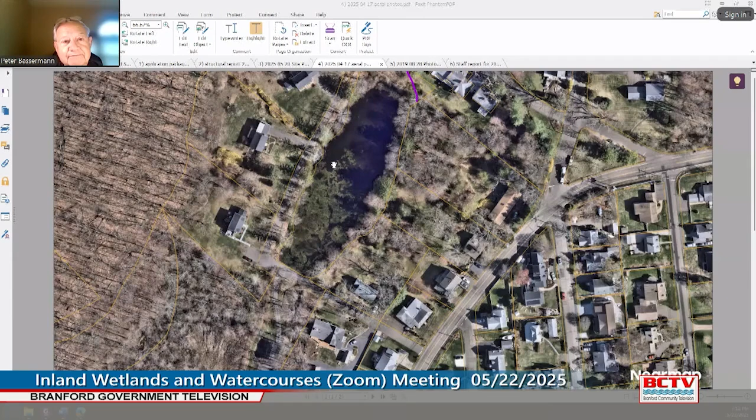So this road here is Hotchkiss Grove Road, and Orchard Ave comes off of it. The subject bridge is, if you look at the pond area, you can kind of see a straight water course, and the bridge crosses over that culvert water course. Recently, the commission had an application for the ponds, which is the condominium property just to the north of this pond, just for a little bit of extra context.

So with that being shared, I will hand it over to the applicant to give an overview of the project. Paul? Thank you, I hope you can hear me. My name is Paul Muniz. I'm the chairman of the Solid Waste Management Commission here in Branford.

I'm also the past president of the Hotchkiss Grove Shore District, and I'm the current vice president of the Shore District. The Hotchkiss Grove Shore District is responsible for private road maintenance within the dimensions of the district, even on private property. So we have to maintain private roads in our district and then private roads within our private district.

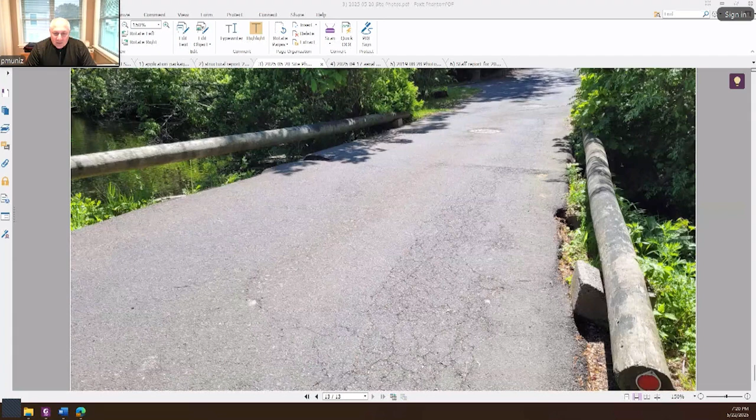At this point, it's the only road in Hotchkiss Grove that has a bridge. At the point of the bridge, it's significantly narrower than all the other roads in the district. It's unique in that, with the exception of Orchard Avenue, all of the avenues in Hotchkiss Grove are jointly owned by all of the property owners. So you own your property, and then you also own all of the roads. But on Orchard Avenue, built after the original 1920s deed subdivisions, the property lines extend differently.

The property lines extend all the way across what otherwise would have been a jointly owned right of way, not just to the center of the road. It's kind of a jigsaw puzzle of ownership across the full dimension of the Orchard Avenue paved roadway. It's very unique, to say the least.

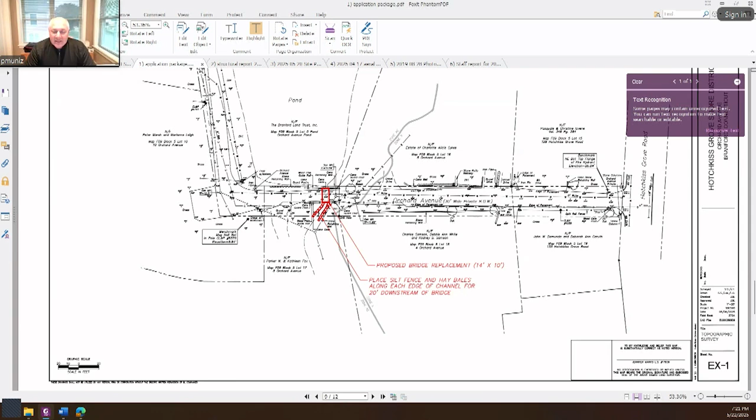One other overview question: each deed does carry an easement to the shore district or to the association for use of the area that serves as the right of way.

Another question: the culvert, which seemed to be an issue in 2019, has somehow improved over the years? Even in the 2019 application, the comment on the culvert was that it is in no danger of failing.

But I think the approach in 2019 was to replace the combined culvert and bridge feature with something called a box culvert, which is capable of being driven over. So the idea was remove the culvert, remove the bridge, install a box culvert — you get two for the price of one, but the price of one was more than the board had money to spend, and it stuck in the throat that we were replacing a culvert we didn't own and had no specific responsibility to replace.

So it took seven years of — I won't say arm twisting, but education — to come up with a means of providing a bridge that was acceptable to the board.

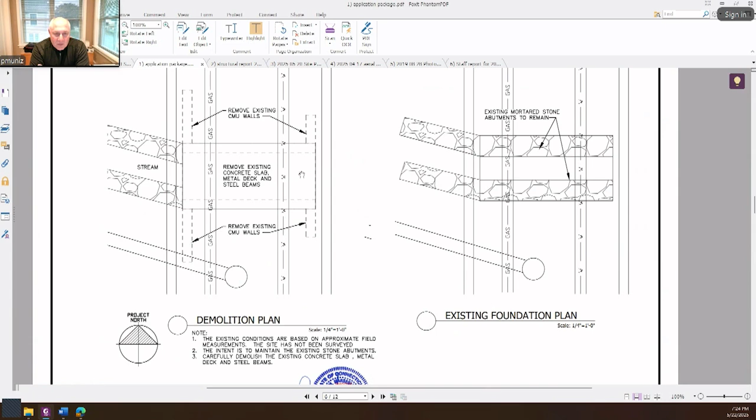No — the bridge deck at present consists of beams laid on the stone culvert. A corrugated steel pan was placed on top of the beams and concrete was poured into the pan; that's the current bridge. We're going to remove that pan and the beams, and then further outward from the culvert, we're going to excavate trenches, cast them with reinforced concrete, and lay a bridge deck across the new foundation. So it will span larger than the existing bridge, and it will not be loaded onto the culvert.

Now, what is the current age of the bridge? We believe it was built in the 50s or 60s, probably on a weekend. It lasted a while.

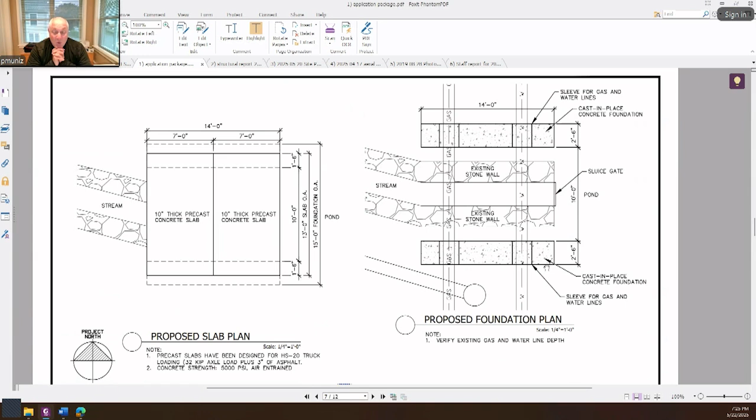My only concern is that interior beam. It's going to be gone. The beam will be gone. So, the whole bridge deck will be removed, and something bigger will be installed essentially over it.

I don't have any analogy I can offer you without thinking too hard. Okay, all right, I appreciate it.

Jamie Frederick, Wetland Agent: something we didn't really discuss is how will that existing bridge plate be removed in a way that won't result in anything falling into the watercourse of the pond? Good question.

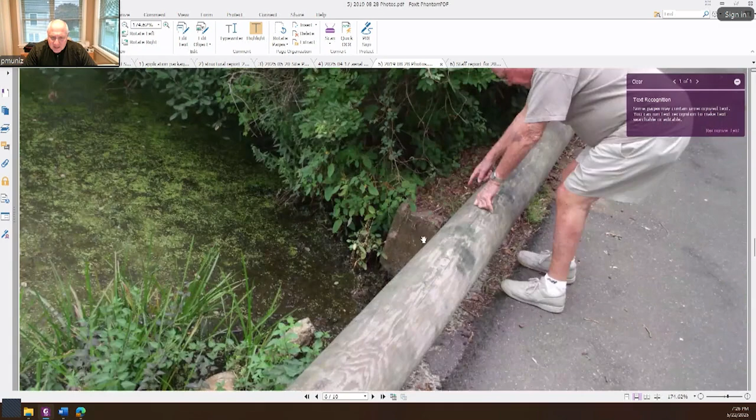There are some photos that you might be able to put up. There's some space between the top of the culvert and the bottom of the bridge. We could lay plywood in there to catch any broken pieces as the bridge is being taken apart.

Is there any, let's see what else we've got for photos. I think there was a view of the beam. Yeah, right there, maybe.

So we should be able to either put a net or some plywood in there to catch any pieces of concrete that might fall into the culvert. There's also, the culvert is, well, that's the culvert, but there's an image, I think it might be photo number 10, that shows what this culvert discharges to.

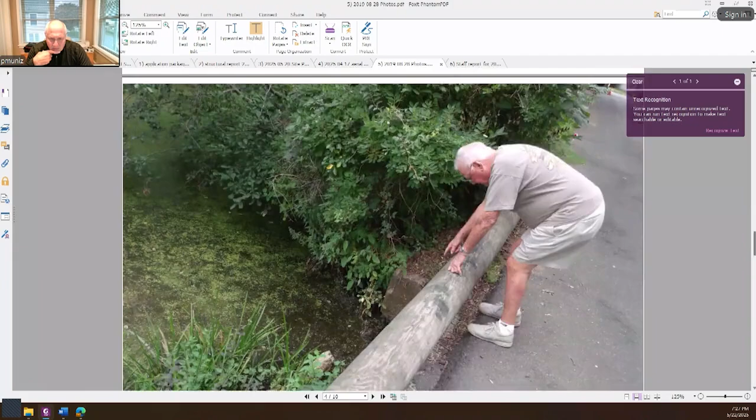Keep going. It might be in the... Yeah, that one. Back one. Okay. Yep. Right.

So this is the view looking downstream from this little 10-foot bridge into the applicant's property, 8 Orchard Ave. It's a stone-lined water course with an inch of water in it. If any pieces fell in, we could hand pick them out.

This is Commissioner Bassermann. Jamie, would it help to look at the staff report and the questions that were raised as you thought of the staff report, to kind of focus our attention here? We could potentially do that, or it sounded like Mr. Muniz may have prepared some responses for those items. I'm not sure which makes more sense. Would it be helpful to look at the plans while you go over that?

Yeah, I could go through it pretty quickly. Okay. So, with respect to the staff report, if you each have it handy, the first portion is the site history.

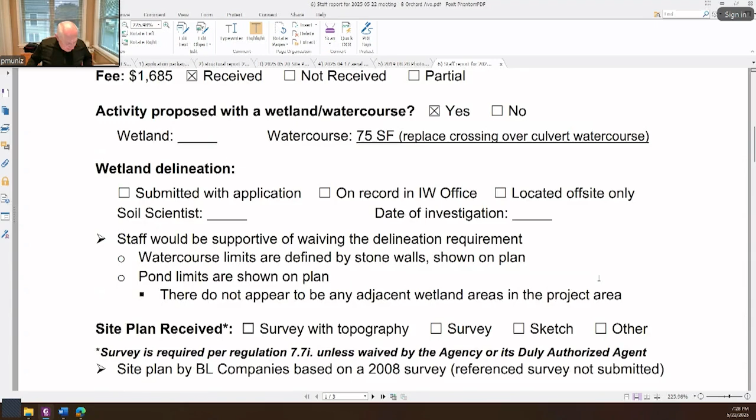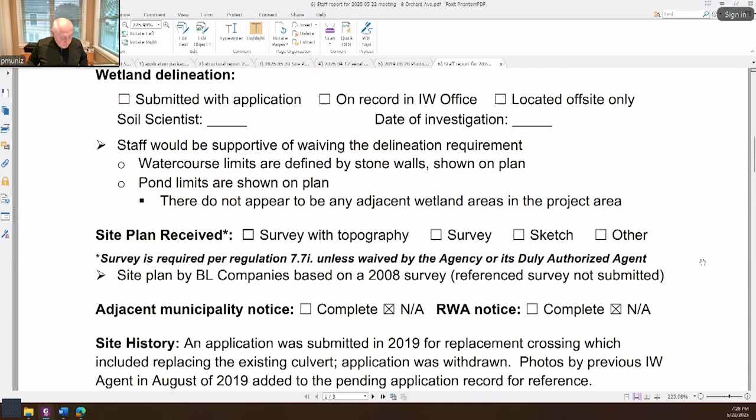As I said, we need to replace the failing bridge within the mapped wetlands area. The 2019 application proposed a culvert replacement, but the culvert is not faulty - the bridge is failing. I don't know what else I can tell you for history. Let's see here, what other...

The plan is to work during dry weather, going back to the history. So the plan was to work during... okay, so look at this one. The 2019 application was different - it included drawdown for the culvert. We're not replacing the culvert, so we have no intention of drawing down the water level. And we do, I would say, intend to do the work in dry weather.

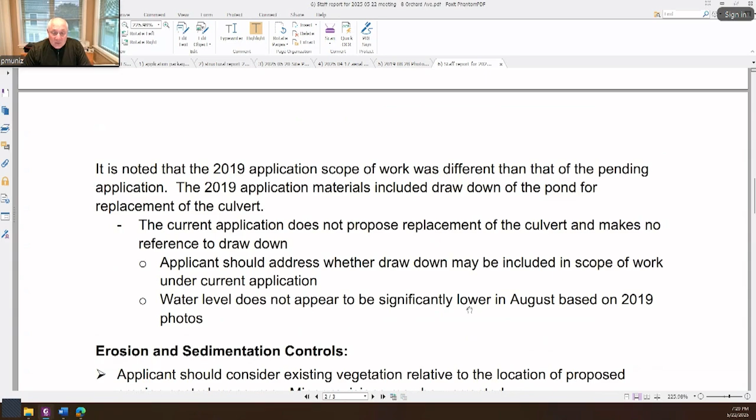Ms. Frederick has pointed out that the 2019 photos taken in August show similar water levels. I will say two things: one, we don't intend to drop the water level. If it is lower, it'd be favorable.

I will say I do not know the process that the property owners used to manage the water level when it was owned by the 8 Orchard Avenue owners. And I don't know what process the Branford Land Trust uses, or if anybody even knows that they can adjust the water level. We could talk to the former owners and find out what the practices are, but we're anticipating.

I've lived in the neighborhood for 35 years. I have seen that thing just be a mud puddle. If we were to see it, if we entered a drought period, we would seek to initiate the work as close to that as possible.

The next section of the staff report was on erosion and sedimentation controls. The first bullet was the request to consider existing vegetation relative to the location of proposed erosion control measures. Minor revisions may be warranted. We discussed that in the field. And I think...

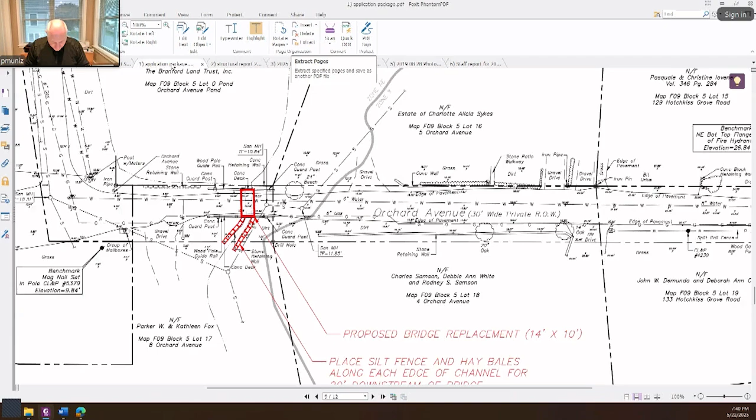That's good. It's also shown in the 2019 drawing. So the design plans call for removal of... well, I take a step back. The notes for the demolition say carefully demolish the existing concrete slab, the metal deck, and the steel beams, which is shown in the drawing.

The drawing also shows remove existing CMU walls. The CMU walls are non-structural and really are only serving as wing walls, or, they're installed as wing walls.

They probably functioned as curbs when they were initially built. What the note should have said on the drawing is remove the existing CMU walls to the extent necessary for construction. We don't really need to remove those CMU walls other than where they have any conflict with the dimension of the foundation trenches to be excavated.

To the extent that any CMU wall is removed, that volume of concrete block will be replaced with cast in place concrete volume. So it's a non-structural feature. Removal of any portion of the CMU wall won't affect the wing wall or curb function, because it's going to be replaced volume for volume with cast in place concrete.

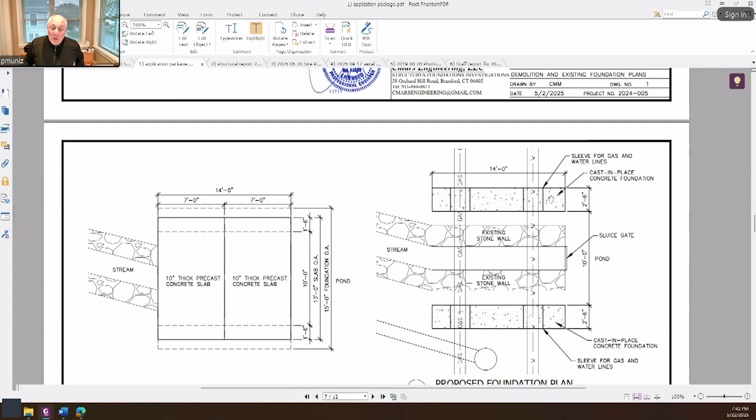The last sub-bullet is to consider any potential conflicts with the sewer line, which is a legitimate concern. There is a sanitary sewer manhole in Orchard Avenue south of the bridge. That manhole directs flow. From that manhole, the line travels west into the 8 Orchard Avenue property.

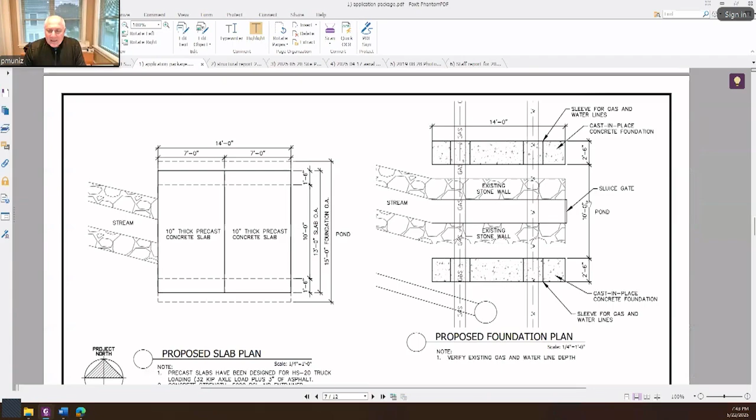I think it was photo 10 on the 19. It's also shown on the survey. Yeah, kind of, you can see it. So it travels south of the culvert into private property. It does not intersect with the intended placement of the foundation trench on the south side of the bridge.

We do not have the invert elevation of the sewer line in either manhole, which we can get. I don't know that we need it though. The interaction of the sewer line with the intended foundation trench...

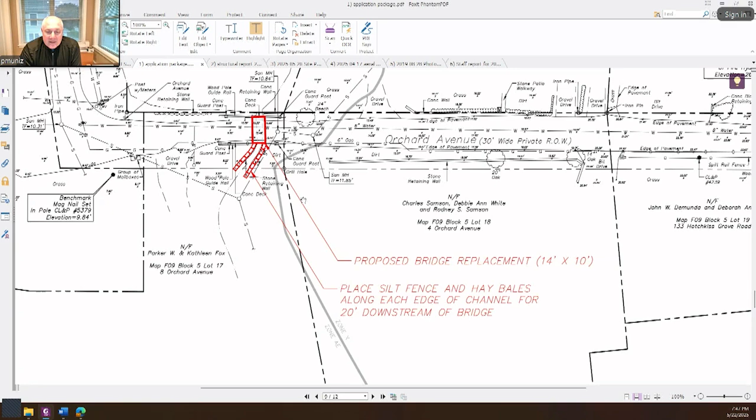If the bottom of the foundation extends lower than the sewer pipe, there will be no horizontal load on the sewer pipe. If the bottom of the foundation is higher than the elevation of the sewer pipe, there's a potential for a horizontal load onto the sewer pipe. In that case, according to the design drawing, the bottom of the excavation would be filled with crushed stone to distribute that load further and take the load off of the sewer pipe.

In addition, not shown on the drawing or plans, in consultation with the engineer—if we go to sheet number 2, this is sheet number 3. If we go to sheet number 2, on the right-hand side, the south foundation shows proximity to the sewer line, which is that manhole with the lines coming out of it. The western side of that southern foundation could be tapered.

Instead of being 2 feet 6 inches wide, it could be narrowed down to as thin as, I'm going to say 20 inches. I had it written down. So we could taper the shape of that southern foundation to increase the distance from the corner point of the foundation to the sanitary line. It's a good question, and we have a couple of different solutions that we could provide. The selection of the solution, if it turns out to be a problem in the field, would probably need to be determined in the field based on the actual position of the sewer line.

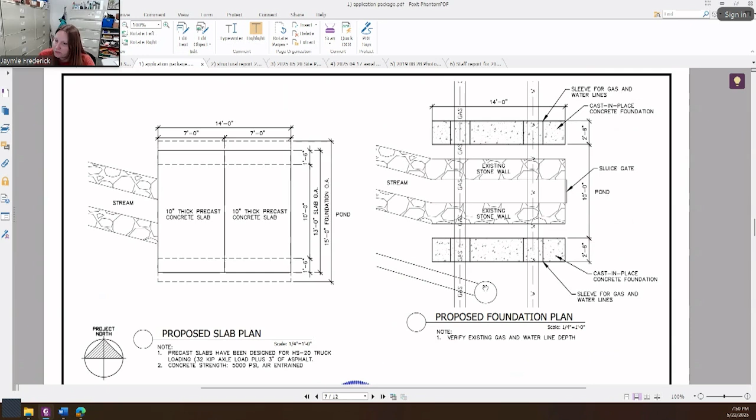The engineering department has reviewed and provided comment, which I did not get in the Dropbox today, but I was CC'd on. The comments pertain by and large to this concern we're talking about right now, and there are also some comments about ensuring that the flows are not changing and that flood status will not change. This is Mr. Muniz. I did obtain comments from Jennifer Aquino in the engineering department today at 3 o'clock, and she did address this same topic with respect to proximity to the sewer line.

I spoke with the engineer about it after I received the comments, and those are the suitable responses. We could taper the shape of the foundation on the south side to increase the distance from the sewer line. It could go down to 20 inches, possibly even 16 inches of width in that corner to meaningfully increase the separation between the foundation and the sewer line. Alternatively, we can clarify the final depth of the foundation once we learn the burial depth of the pipe.

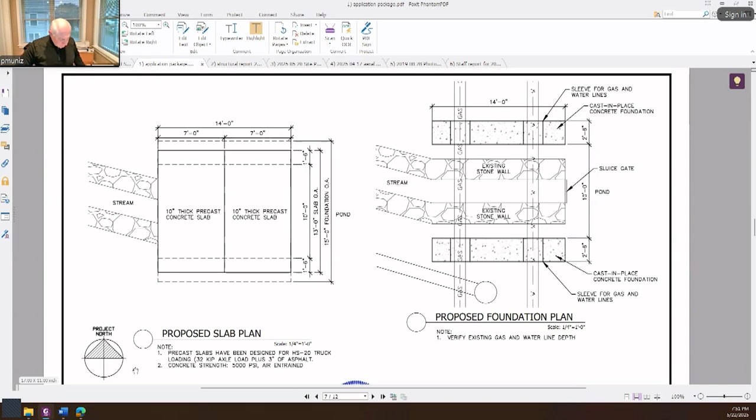The last two areas of staff comments with respect to stormwater: will there be any changes in stormwater management with respect to existing road drainage sheet flows on the east side? Stormwater drainage flow only comes from the south side of the bridge, which is higher elevation than the north side.

On the east side of the south side of the bridge, the camber of Orchard Avenue is oriented to the east, so water flows across the road, sheet flows onto landscaped property south of the pond.

On the west side of the south side of the road—in this image it would be... wait, no, on this image it would be the right-hand side of the drawing, on the upper part of the image above that stone wooden guardrail. There is some flow on that side of the crown of the road that runs down a gutter.

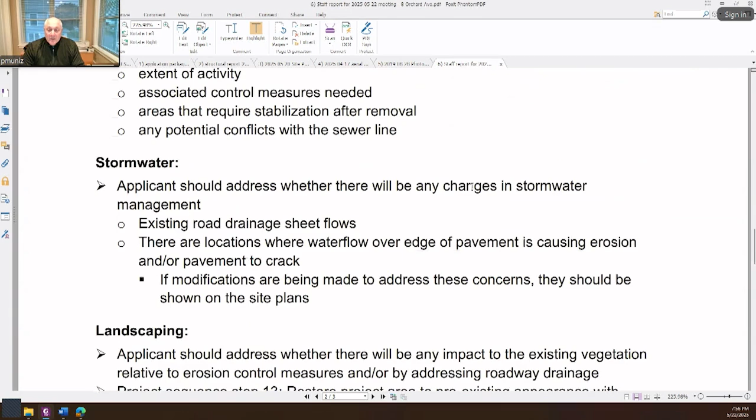The last area of consideration was landscaping. Will there be any impact to existing vegetation caused by the erosion control measures? I would say it would only be temporary. As I pointed out, they're below the first level of branches on the non-invasives. There's a couple of feet of clearance where we could install silt fence and hay bales on the south and west side of the bridge. That's really the most sensitive wetland portion of the construction.

We offered to provide a wetland seed mix after construction is complete. We can include a specification for the mix that we would obtain if that's needed, and I think it's something the commission typically likes to see, with the understanding that it could always be swapped out for something comparable. If you have a preference published somewhere, we'd be happy to use it.

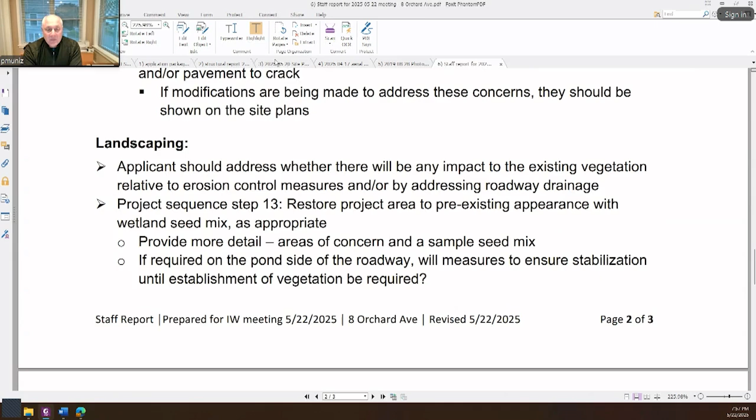The last question was, if required on the pond side of the roadway, will measures to ensure stabilization until establishment of vegetation be required? Again, if we go to one of the photos, the only thing we can really do there is silt fence or hay bales. There's not a lot of room to work.

Jaymie Frederick, the Wetland Agent, asked: for the commission's benefit, would you be excavating the entire width of the road to put in the footing, or is the footing not as wide as the pavement? The footing is going to be as wide as the final bridge deck. The design calls for 14 feet of width.

After being in the field the other day, I checked on the typical width of fire apparatus, which is 8 to 10 feet. We conceivably would modify the design to go down to a 12-foot width, so we have a little more room to work with within the roadway without threatening the wetlands on either side. A 12-foot road and a 12-foot bridge instead of a 14-foot bridge would still be adequate for fire apparatus, but we want to excavate the least width necessary. The planks would be 6 feet instead of 7 feet, times 2.

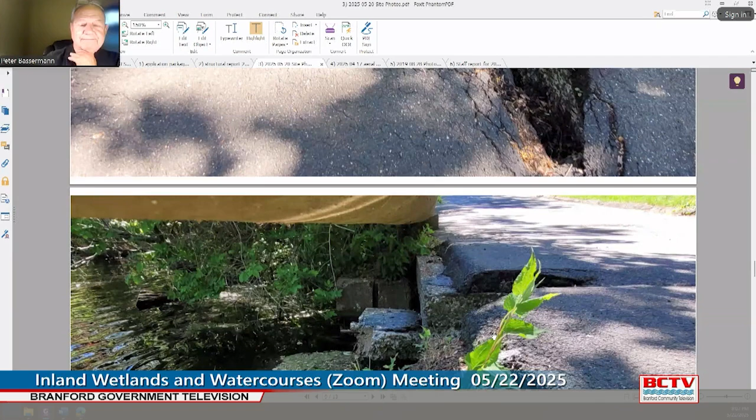Commissioner Bassermann: any other comments from the commission for Mr. Muniz to consider as he revises the plans? All right, then I guess.

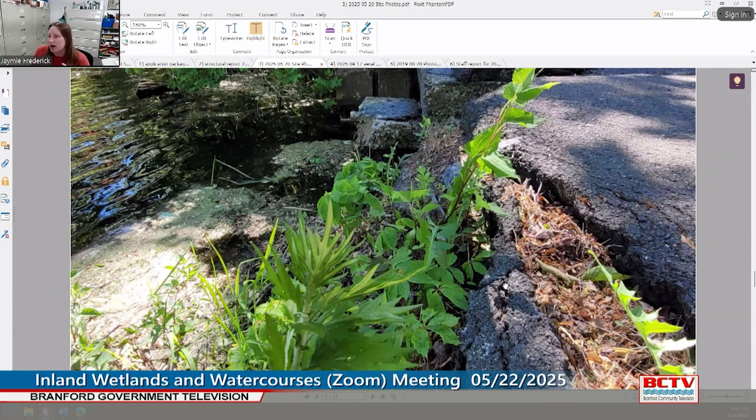And the wetland agent, real quick, I just want to point out, I think you touched on everything and addressed it for the most part. I just really want to stress that I am concerned about stability on this side while the replacement is being done, especially because you will be digging down and you're not really going to have much soil between where your foundation is and the pond. I don't know if the pressure from the pond is going to just blast through what's left of that bank, and then you're going to have the pond in your footing. So yeah, that's what I want to see addressed.

We talked about that. I'm sorry, I interrupted you. No, it's fine. So this is Mr. Muniz. We talked about that with the engineer this week, and in terms of means and methods for construction, a segmented excavation of the trench would be possible, so that if we started on that side or finished on that side, as opposed to digging the full length of the trench curb to curb, you could install a...

I call it flowable fill, controlled low strength material, which is concrete without aggregate, which is very low permeability. The equivalent of a shaft depth on that side of the road could be excavated to the target depth, filled with the low strength material, which is impermeable, and left - it cures in a matter of hours - and then left in place for the remainder of the trench excavation on the continuing side of the trench, and then go back. It's controlled low strength material, so it's able to be broken back up with a backhoe bucket, so you could dig it back out and finish the concrete pour.

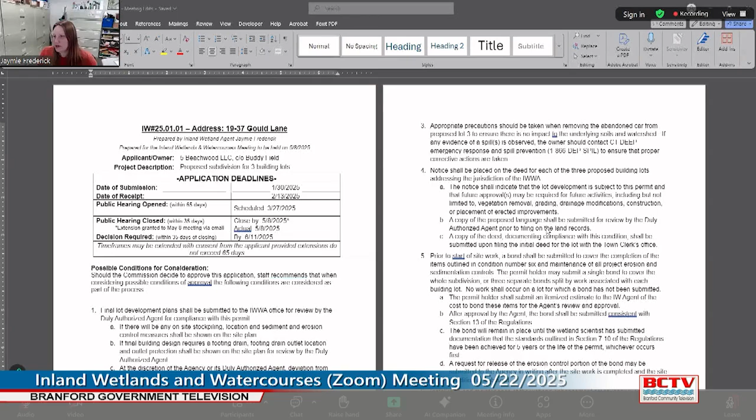I'm not sure, just for clarification, what's the date on the document you're referring to? Let's see, is there a date on this? Or maybe there is no date. No, there is no date. Okay, there is no date. Then I know what you're talking about. Let's screen share and confirm. All right, is this the document you're looking at? Yes, yes, okay.

Start at the top and go to the bottom. Real quick highlight: the commission either has to make a decision this evening, request an extension, or schedule a special meeting. So just keep that in the back of your head, and we'll revisit it if it becomes necessary.

I tried to order these in the order that it would be relevant to the permit holder. The first one being that final lot development plans shall be submitted to the Inland Wetland Office for review by the duly authorized agent for compliance with this permit.

If there will be any on-site stockpiling, location and sediment erosion control measures shall be shown on the site plan. If final building design requires a footing drain, outlet location and outlet protection shall be shown on the site plan for review by the duly authorized agent.

And C, at the discretion of the agency or its duly authorized agent, deviation from the subdivision plans will require a new permit for lot development from the agency. So that would be if there's an increase in impervious area that requires a change in stormwater management, if there's an increase in the lawn area, things like that.

If the footing drain is shown within the existing lawn area and it has an energy dissipator, I wouldn't say that kicks into 1C, which is why I specifically called that out. Same with the stockpiling, because stockpiling is fairly typical for development, and assuming it's within the active area of construction and is properly protected, I don't think that's a need for a new application. It's just a best management policy, if you will. Any questions on one? Nope.

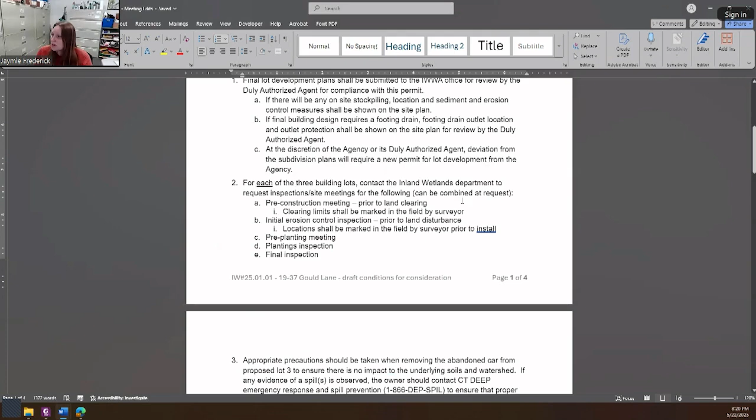Sometimes pre-construction and erosion control will be at the same time. And or maybe if multiple lots are being constructed by the same person, they might want to do lots 1 and 2 at the same time or something like that. So that's what I mean by can be combined at request. Any questions there? No.

3, appropriate precaution. This was in response to comments and discussion at the public hearing. Appropriate precautions should be taken when removing the abandoned car from proposed lot 3 to ensure there is no impact to the underlying soils and watershed. If any evidence of a spill is observed, the owner should contact CT DEEP Emergency Response and Spill Prevention to ensure that proper corrective actions are taken.

Commissioner Murski: just one small question. I know that this issue was addressed, like you said previously, by a resident. Is the idea just that if something is observed they should contact DEEP, or is the concern a little larger — the idea that the vehicle has been there such a long time that there could be a concern about the soil that could not be visible — or is it just that we don't have any say in the matter, and that is just a question about whether something is visible or not?

Yeah, certainly there could be something in the soil that is not visible, and I would encourage the property owner to investigate. I think it might be a stretch of the agency's jurisdiction to require them to. I mean, they could have removed the car before this application, and we would have never known it was there. We don't really regulate the removal of junk cars, if you will.

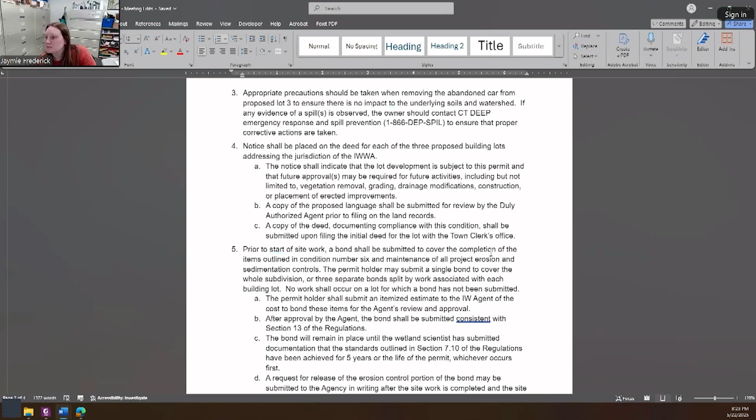This is Commissioner Bassermann. Jaymie, just for clarification, so on the deed for the property itself, there will be a section on the deed indicating the issue that we're addressing here? Correct. Yep. It's just a notification, a statement on the deed, which hopefully everyone's reading whenever they purchase property. And it would carry forward with every future deed as something that pertains to the parcel.

Okay. Number 5, prior to start of site work, a bond shall be submitted to cover the completion of items outlined in condition number 6, which is the next condition, and maintenance of all project erosion and sedimentation controls. The permit holder may submit a single bond to cover the whole subdivision or 3 separate bonds split by work associated with each building lot. No work shall occur on a lot for which a bond has not been submitted.

And so 6 is the mitigation or enhancement plantings, if you will. So this is one of the places where there was definitely talk about having a bond for the mitigation or enhancement areas. We didn't necessarily specifically talk about the bond including erosion control measures. So if anyone thinks that that requires revision, make sure you let us know. Going into the subsections, the permit holder shall submit an itemized estimate to the IW agent of the cost to bond these items for the agent's review and approval.

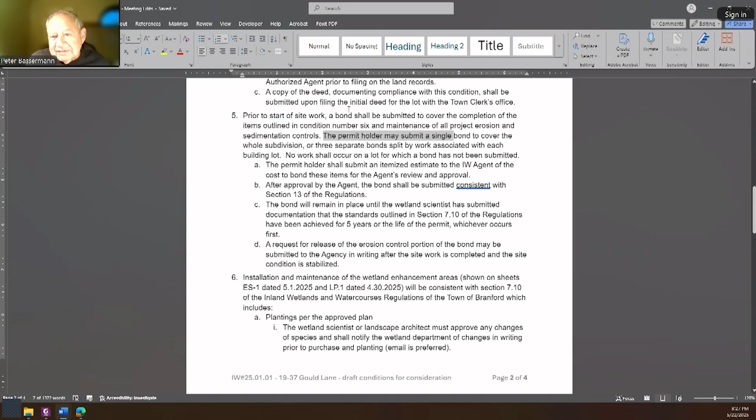Because I didn't want to require it to be 3 separate bonds, but we can. I think it's just because of how the wording came to me. Given past experiences and things that go bump in the night, wouldn't we want more leverage, more control than less? So we could say: prior to start of site work on any lot, site work on a lot, a bond shall be submitted to cover the completion of items outlined in condition number 6 and maintenance of sediment and erosion controls for that subject property. Yep, lot. Good.

This is Commissioner Goklowski. Wouldn't separate bonds be a lot easier in the future when an applicant is looking for a release of a bond, if the criteria of the bond has been satisfied under the bond requirements or under the approval process? In this particular setup, I think it works really well because there's nothing connected. On a subdivision where there's shared infrastructure, I'm not sure how that would work. But that's not what's before the commission right now, so we do not need to have that conversation right now.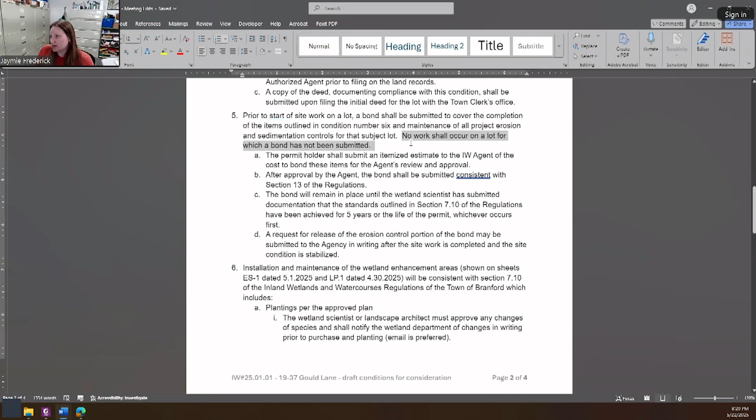So I think it's now repetitive. Prior to start of site work on a lot, a bond shall be submitted to cover the completion of the items outlined in condition number 6 and maintenance of project erosion and sedimentation controls for that subject lot. Does anyone feel it's necessary to keep this last sentence? No. Kind of reiterates the first part. Right.

This is Commissioner Mursky. I just had a question of clarification, and also a comment. I agree with the 3 bonds. It seems overly obvious to me that would be beneficial to the commission for enforcement.

But reflecting on one other example, without getting into that example, when a bond discussion was brought up on another application, there were different types of bonds. I know it says here erosion and sedimentation controls, but can it be clarified, or perhaps I misunderstood? Is this the only kind of bond we need per subdivision? I recall we had some other example where there was a bond for erosion, and then wasn't there a bond for plantings, or am I incorrect about that?

Not for this particular application. I'm just asking. Yeah, that's condition number 6. So we haven't gotten there yet. Okay, it could clarify that to say it's to cover completion of the wetland enhancement items.

Wetland enhancement items outlined in condition number 6 and maintenance of all project erosion and sedimentation controls. Does that make a little bit more sense?

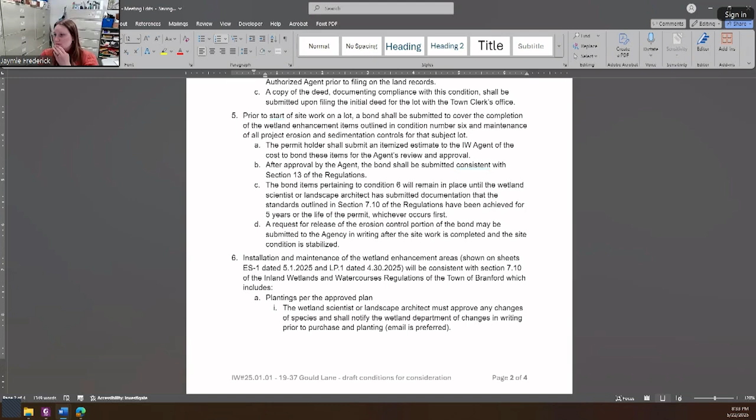Pertaining to condition 6 will remain in place, so that kind of distinguishes everything aside from the erosion control measures. Does that make sense? And again, we haven't read condition 6, so we can always go back if anyone has concerns after we read condition 6.

All right, so on to condition 6. Installation and maintenance of the wetland enhancement areas shown on sheets ES1 dated 5/1/2025 and LP1 dated 4/30/2025 will be consistent with section 710 of the wetland regulations of the town of Branford, which includes plantings per the approved plan. Wetland scientist or landscape architect must approve any changes of species and shall notify the wetland department of changes in writing prior to purchase and planting.

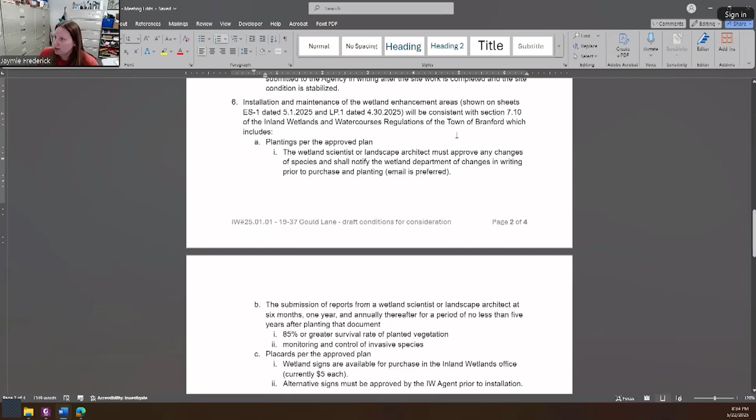Email is preferred. B, the submission of reports from Jaymie — do we normally call ourselves the wetland department? Don't we say the agent or... that's kind of a new term, no?

I think I copied and pasted it, but we can put wetland office if you'd prefer. Well, I do feel like we usually use office, so I'm not sure. We could say wetland office or the duly authorized agent. Do you have a preference? Authorized agent is what we usually say, right? I think it's the most appropriate.

B, the submission of reports from a wetland scientist or landscape architect at 6 months, 1 year, and annually thereafter for a period of no less than 5 years after planting, that document 85% or greater survival rate of planted vegetation and monitoring and control of invasive species.

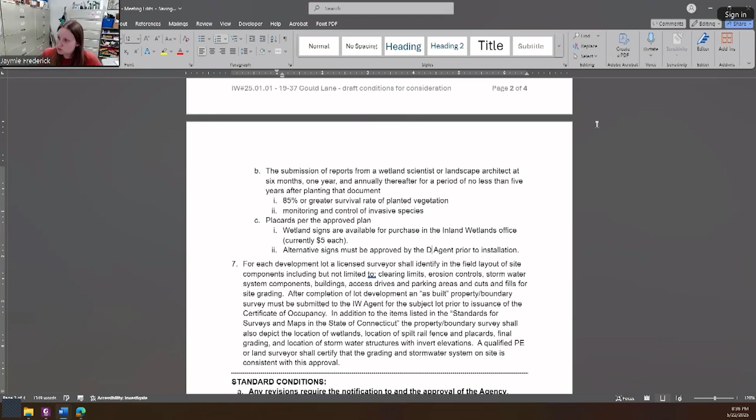And then C, placards per the approved plan. Wetland signs are available for purchase in the Inland Wetland Office, currently at $5 a piece, or alternatively, signs can be approved for consistency by the duly authorized agent prior to installation if they have their own sign that they want to use. Any questions? No.

7, for each development lot, a licensed surveyor shall identify in the field layout of site components, including but not limited to clearing limits, erosion controls, stormwater system components, buildings, access drives and parking areas, and cuts and fills for site grading.

After completion of lot development, an as-built property/boundary survey must be submitted to the inland wetland IW agent or duly authorized. I'm gonna have to go back and standardize our language. Submitted to the duly authorized agent for the subject lot prior to issuance of certificate of occupancy. So I added subject lot to our standard language to indicate that this can be done independently for each lot.

In addition to the items listed in the standards for surveys and maps in the state of Connecticut, the property boundary surveys shall also depict the location of wetlands, location of split rail fence and placards, final grading, and location of stormwater structures with invert elevations. A qualified PE or land surveyor shall certify that the grading and stormwater system on site is consistent with this approval.

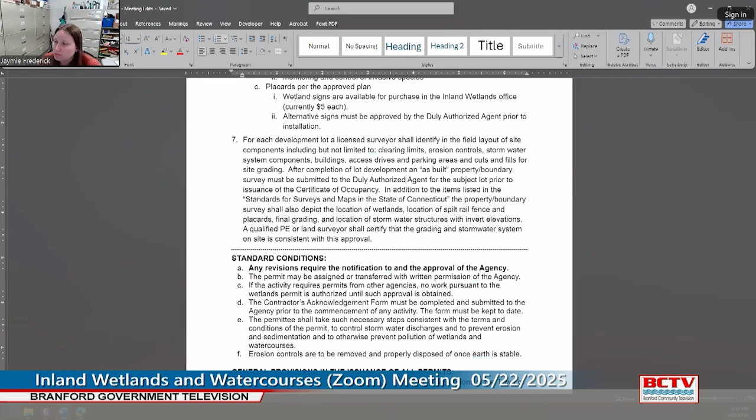And then we've got the standard conditions and general provisions and issuance of all permits. And while we're on the topic of digesting information, the additional condition I thought should be considered is in regards to the stormwater management. Infiltration testing, there was testing regarding infiltration rates.

However, the documents indicate that there shall be final infiltration testing prior to installation of the systems. So I would recommend the commission consider a condition that says for each building lot, findings from the additional infiltration rate testing to be conducted per the hydrology study report revised April 28th, 2025, shall be submitted to the agency to affirm that rates comply with this approval prior to installation of the stormwater management system, just to confirm that what they said will work on site, in fact, will work on site, and that we're good to go moving forward.

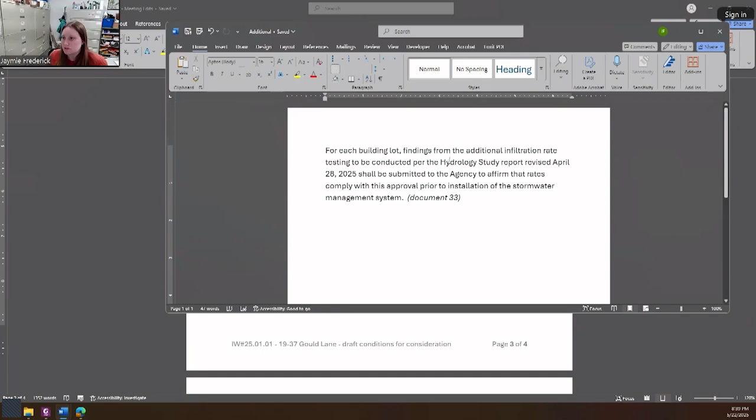Should it not be what it was said to be, then that kicks them back to condition 1, where they have to change their site plan to establish compliance with the regulations. Any questions on that one? Nope.

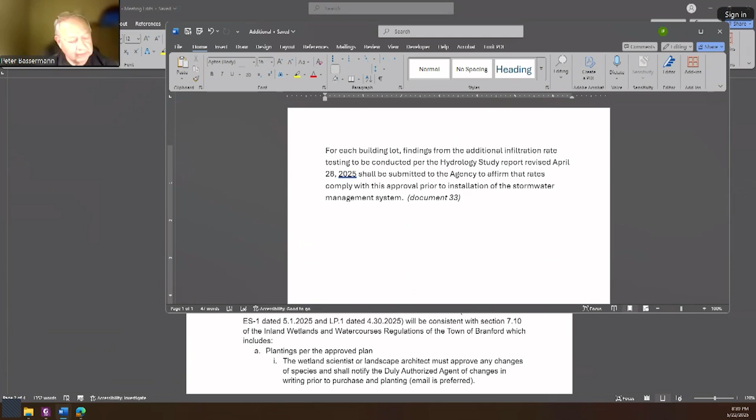This is Commissioner Bassermann. Jaymie, I do have a question, I guess, on item 2, and I may be overthinking this. Item 2B basically says before construction, I guess, of the building itself, foundation or anything, you're going to have an initial erosion control inspection. Am I right on the timing?

Prior to any land disturbance, that would be essentially grubbing, or it could be. Right, okay, grubbing's kind of the first step. So I don't necessarily require it prior to cutting as long as we've done the pre-construction meeting and have reviewed the limits of disturbance.

Because, but then we don't meet again, the way I read this, until they're ready to plant, so that's why I have item B as initial erosion control inspection. So they don't necessarily have to contact us for subsequent erosion control inspections. We'll routinely, periodically go out during construction, but they don't have to contact us to schedule those. We kind of like to surprise them so we can see what they're doing on a regular day rather than on a, hey, we're coming by day.

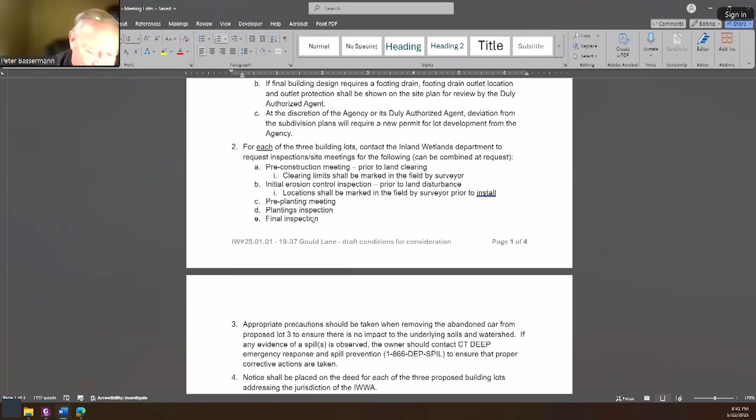Yeah, I guess what I'm trying to anticipate, and we've seen this when we have multiple lots being developed, where you start out with a plan as well intentioned as it may be, and with all of the appropriate professional experts, and then it doesn't work the way it was designed to work. And the only way that we pick that up, I guess, is by those inspections. The onus is on us.

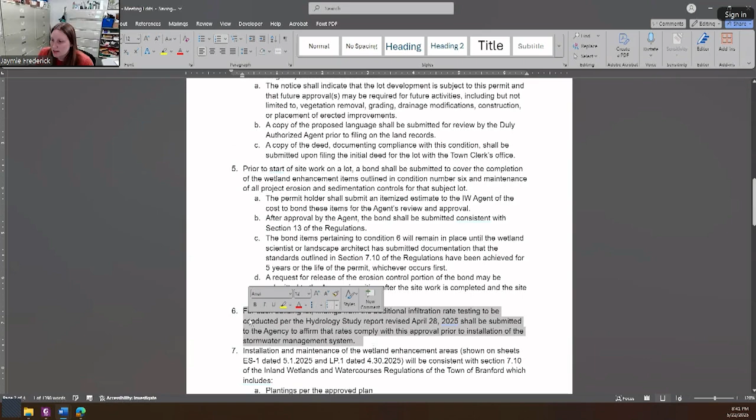Yeah, so I would say yes, with the understanding that... sorry, I just wanted to make sure I didn't forget to paste that.

Generally speaking, yes. We do have a contractor's acknowledgement form referencing permit condition number, standard condition D, which is the person developing the site acknowledging they've reviewed the permit and plans, and understand what they need to do. So they're certifying they're going to do what the permit says, and we're counting on them to do that.

Yeah, if there's a problem according to the site plan. But I'm saying, let's say the plan didn't work, so...

I think this particular development is a little bit unique from the subdivision, from some of the problem sites we see. Not to say it won't necessarily have its own problems. But in the sense that each of the three lots are fully encompassed with their own control measures, and there's nothing that spans. So nobody's going to be taking down a silt fence to say, oh, I had to grade these two lots together. That's not a problem. There's no steep slopes, so we don't have that issue.

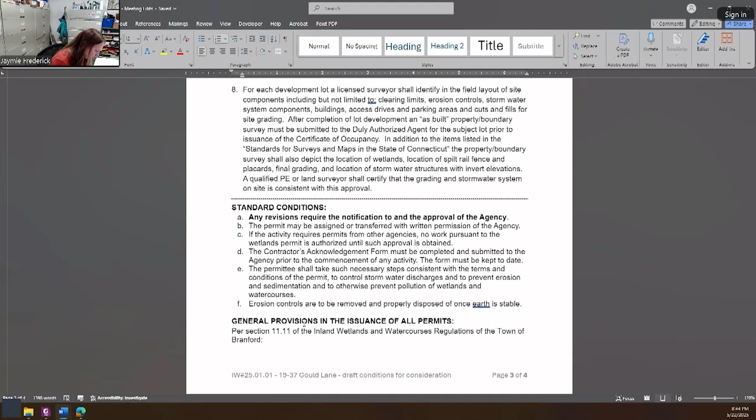Additional temporary erosion control measures shall be installed as required by the zoning enforcement officer and/or wetlands enforcement officer. So if we're not satisfied with the measures for any reason, we can require that they address that. Thank you.

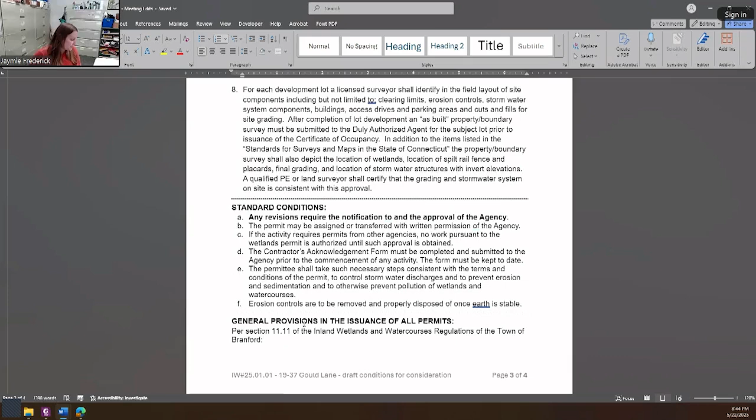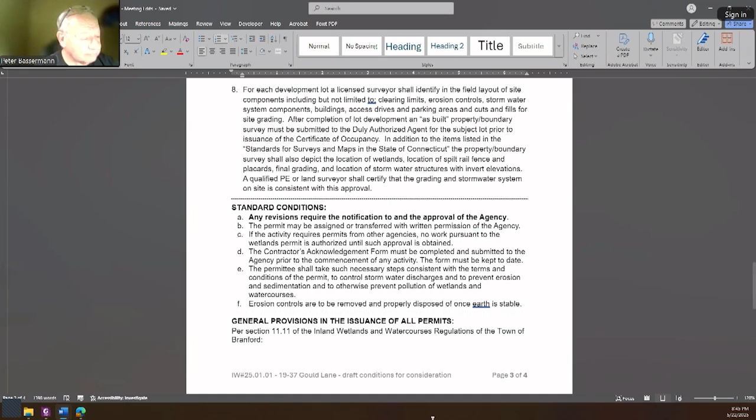Any other thoughts from the commission on additions or changes to the material we just reviewed? Given the silence, is there a motion in the wings regarding inland wetland 250101, 1937 Gould Lane?

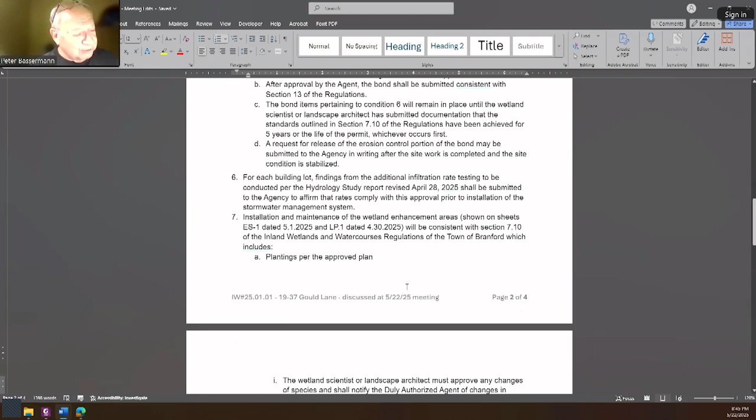Let's see, I'll make a motion. As Commissioner Bassermann, I'll make a motion that the commission approve inland wetland 250101. Jaymie Frederick and the wetland agent—Peter, I can't hear you. I don't know if anyone else can. Oh, did I hit a button here? I can hear you now. Maybe it's because you weren't looking at your mic. Oh, okay. This is Commissioner Bassermann.

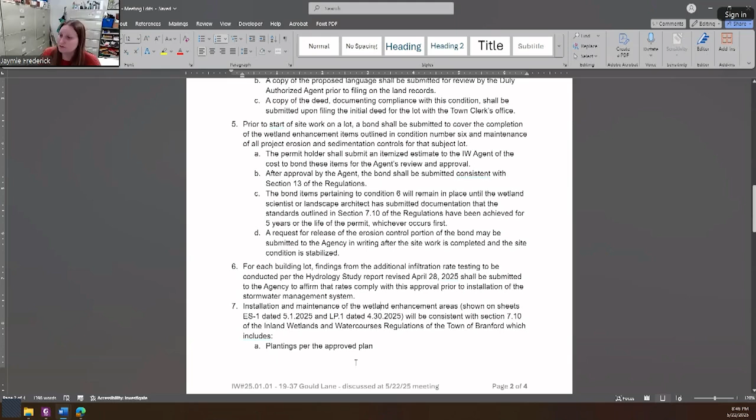I make a motion that we approve inland wetland 250101, 1937 Gould Lane, for 3 residential lots. We have reviewed a staff report dated this evening, May 22nd, 2025, items for possible consideration 1 through... did we number that one, number 8, Jaymie, that you added? It was complicated, and I made it number 6. You could say as wordsmithed at the meeting, since I've made a couple of edits and have this document saved. So let me say: I make a motion that we approve inland wetland 250101, address 1937 Gould Lane, 3 residential lots, with the conditions specified on the staff report dated May 22nd, 2025.

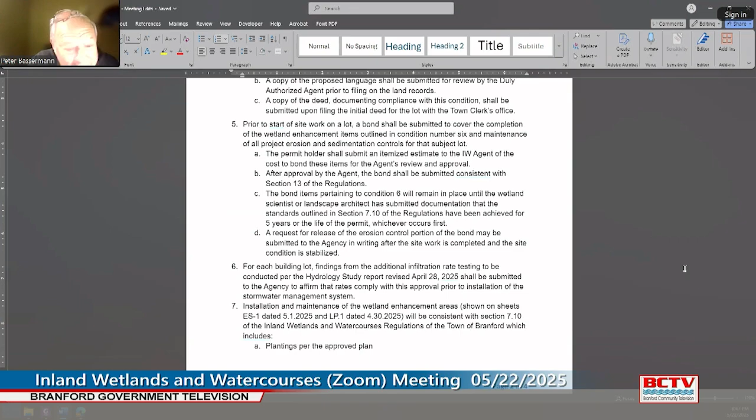Possible conditions for consideration 1 through 7? 1 through 8. 1 through 8, that's what I thought. 1 through 8, including the standard conditions and the general provisions in the issuance of all permits.

End of story. Commissioner Goklowski, I second that motion. Any further discussion on inland wetland 250101? Okay, we'll take a roll call vote.

Commissioner Goklowski, aye. Commissioner Ormrod, aye. Commissioner Papantonis, aye. Let's see, I'm missing Commissioner Mirsky—Commissioner Mirsky, aye. Commissioner Begeman, there you are. See, I only get 1, 2, 3, 4, 5, 6. Commissioner Begeman, aye. Commissioner Bassermann, aye. Okay, we'll move on.

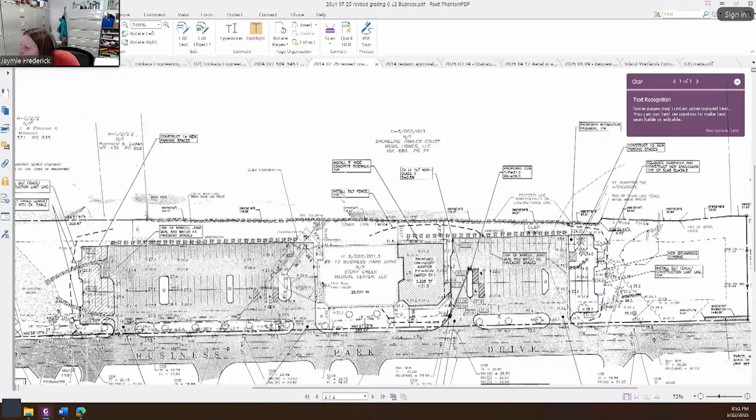So I'm just going to show you the latest plan real quick. On this latest plan for 612 Business Park, where is the call out? You can see this feature between the two property lines — maybe I'll defer and let somebody who has been looking at this more regularly find the call out. I'm not seeing it, but it drains to this inlet structure, which connects directly to the stormwater system without going through the pond, and out to this watercourse between I-95 and these properties on Business Park Drive.

There have been some concerns raised generally about the conveyance of water through this watercourse. The main difference is that originally it was a grass swale, which changed to a stone culvert-type feature, and is now being proposed to have a paved swale. So infiltration and storage capacity would be the two concerns.

And relating back to my memo, going directly to the regulations, the agency may rule that any activity that alters the existing rate or quality of any stormwater discharge conveyed to the regulated area or upland review area is likely to impact or affect wetlands or watercourses and is a regulated activity. So that's what I'm asking the commission to consider. There's a whole sliding scale of what could fall under this, and I'm basically asking you to determine if you think this subject activity falls under that or not.

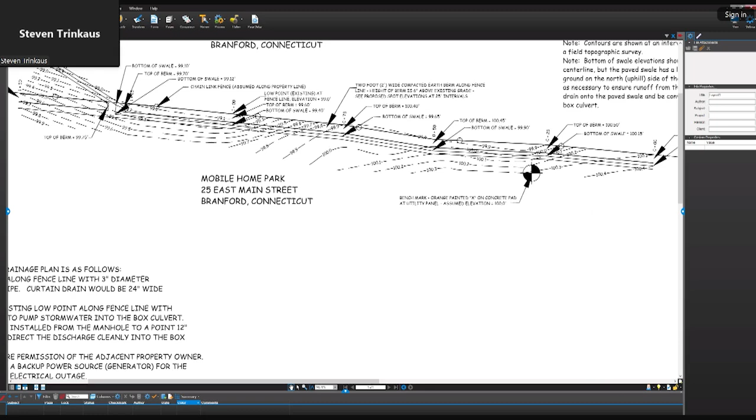simply cannot drain along the fence line and get into the inlet of the existing culvert on the Business Park Drive site. So the original approved swale was actually a stone swale, just a level path of modified riprap, which has a high resistance to flow. It doesn't really convey flow because it has such a high degree of roughness.

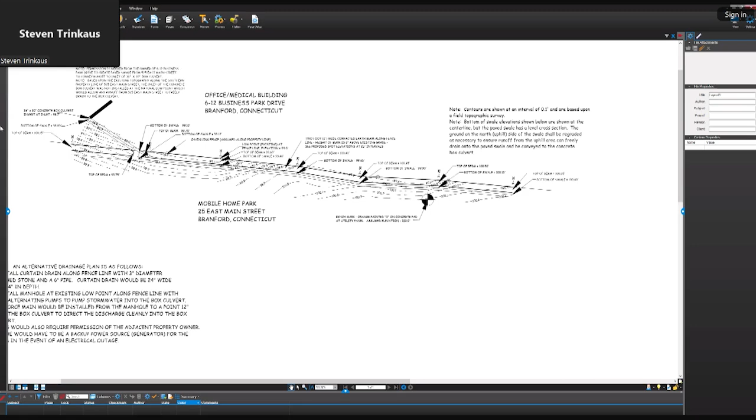So what we propose here, if I zoom into the section, is basically we have the fence line on the right, a little earth berm 6 inches in height and about 2 feet wide, and then a paved level area, so that runoff from the mobile home park will run from north to south and hit this swale. The swale will be 24 inches wide of bituminous concrete.

But what we did is have just enough pitch to go from the eastern end up to the inlet of the box culvert at 1% pitch. This is a 150-foot long run, and there's literally just about 1.5 feet of drop. So with the pavement, water will run on a smooth surface.

The berm is there to basically keep the runoff from the mobile home park onto the paved surface, so that it hits that flat paved area, but the paved path will have a slope from the east running to the west to the inlet of the culvert.

We also have a little section just opposite the culvert that would convey the water going from east to west and then directly into the culvert. This will prevent ponding and flooding on the mobile home property, as it will allow the natural flow of water across their lawn areas, since there is no drainage on the site, to enter the culvert and go on its merry way.

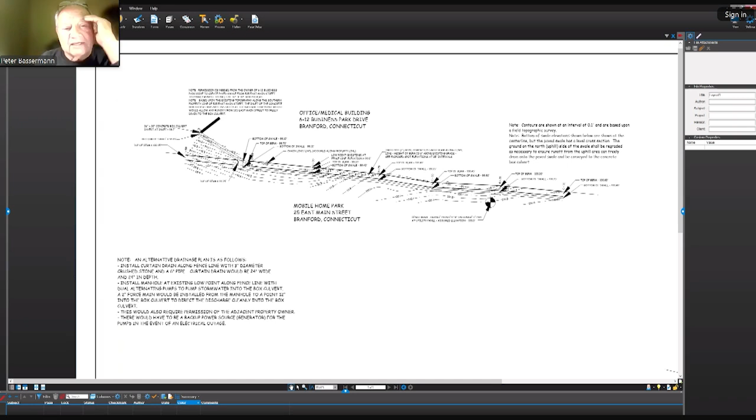This is Commissioner Bassermann. Do we have hydrology data to show what exists and what this plan would change in terms of the hydrology characteristics, given the low pitch, the 6-inch berm, and a 100-year storm? What happens?

No, we don't have hydrology, but if you look at the town GIS, you'll see that this mobile home park and the one to the east of it grade down onto this site, and then it drains all the way down to this western end, where I'm zooming into now. Because it cannot get to that culvert, the soils in this area get saturated. And ultimately, when the soils are very saturated and you get a lot of rain, flooding actually occurs on the mobile home park, around some of the units and even up to the first roadway.

So there's no change in the amount of water going here. We're just giving it a path. Would a 100-year storm be conveyed through here? The answer simply is no, it wouldn't, because that's a tremendous amount of water, and I don't believe the box culvert here, only 24 inches by 30 inches, would have enough capacity to handle the 100-year runoff from the drainage area that goes to this point. We're not increasing the flows here. We're just giving a path for the water to get off the mobile home park and go through the box culvert, whereas in the past, before the business park site was developed, it simply flowed to the south over the property line through a wetland area. So there is no change in that.

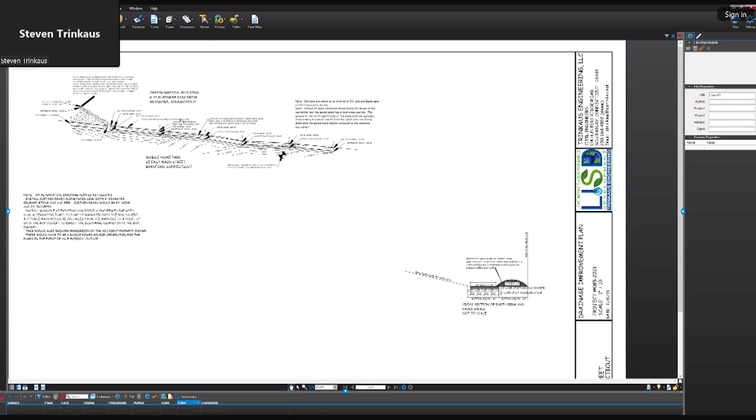I have done only this one plan, which is dated — the other plans are from other parties, from the medical building. And I don't think we have anything newer than 2014, with the exception of this plan.

So I have observed there is definitely a problem with standing water in that area. But given that it directly connects to the system and discharges to the water course, and that we've received, as the town, some concerns regarding the drainage capacity of that water course, I thought I should bring it to the commission.

Mr. President, Jaymie, what are our choices here? Your choices are to say yes, this falls within the purview of our jurisdiction and you need to submit an application — and then I think you need to clarify what level of information you'd be looking for with that application — or you could say no, this is outside the 100-foot upland review area.

While it's a modification to the drainage, we see that you're addressing an existing drainage issue, and based on some of those comments about the restriction of the structure to convey a certain amount of water, more than a certain amount of water at a certain rate, maybe you find that information acceptable to say that this is not your jurisdiction, and that this is a correction of a drainage issue that has been ongoing.

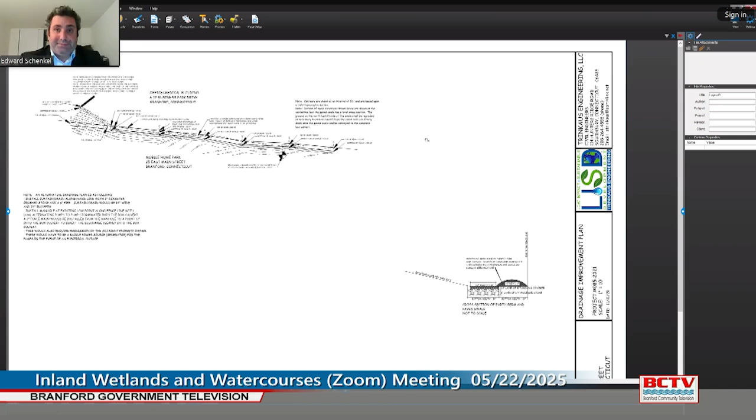And then in regards to, so again, the main concern would be the conveyance of stormwater to a water course in this particular case. And this proposal is essentially a modification to a drainage feature that was originally approved as part of the development of 612 Business Park. Arguably, it is a modification because the original feature, which has been modified over time, is not working as intended, perhaps.

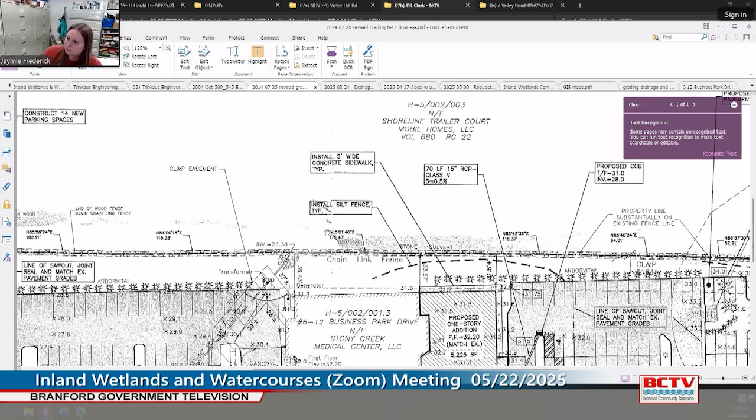So there's very minimum information on what this actually is and how it functions and how it relates to what the original approval was. So I guess my thoughts for the commission are to consider the context of the problem, the context of the concerns for wetlands and water courses, and whether or not you think that this rises to a level that it requires your review, or if it's yet another kind of modification of the existing feature that may not require review by the agency. There's no right or wrong answer here. I think it's in an area where the commission can make a judgment call.

This is Commissioner Bassman. I guess the concern I have is what we have is a plan and some words. We don't typically make these kinds of decisions without some current data on which basis to say yes, there is conveyance, or no, the conveyance is minimal, and the plan would seem to address that. I don't know that at this stage of the game. So to sit here and say that there's evidence that would suggest that it's not impacting the water course, I can't see that. I can't say that. I don't know one way or the other.

This is Commissioner Gulkowski. I'm also a little confused. Attorney Schenkel, you represent the mobile home park, is that correct? Yes, that's correct. Where are the property owners from Business Park?

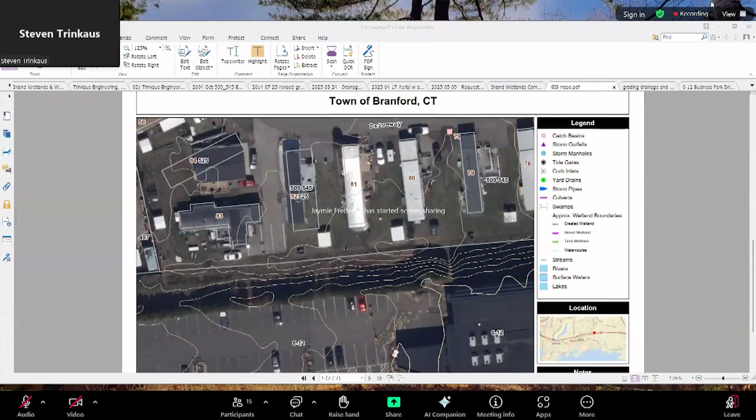Well, yeah, actually, what I have goes all the way up to East Main Street and shows the eastern property with topography, and that's really it. All right, if you want to screen share yours, you can just email it to me.

Yeah, I can email it after the fact, but let me see if this will come up correctly.

These are the contours, and you can see to the site to the east of this, the water is running from the right-hand side of the image, going to the west down this steep slope onto our client's property.

And then it kind of traverses in a southwesterly direction, and there's this one heavy contour here - this is the low spot on the site.

And the actual original low spot, according to your GIS, was actually on the business park side of the property line. The culvert that was installed right about here, but on mapping that's part of the land use record for the business park.

The business park site has spot elevations that actually show this corner down here is the lowest spot. And so what happens is, none of the grading has been changed here.

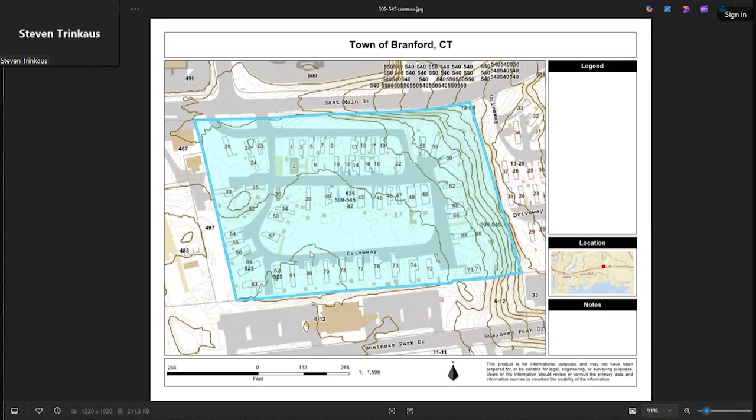It's Jaymie Frederick, being the wetland agent. The contours, I believe, are derived from 2016 LiDAR, but there wouldn't have been significant grade changes since then.

No, yeah. To me, from a drainage comparison standpoint, in consideration of whether or not we would need more information, the thought process is that the drainage feature being altered is the drainage feature along the shared property line.

And essentially, based on the approvals issued for 6 to 12 Business Park, it appeared that there was a feature that was supposed to capture the water from the rear or the north side of Business Park behind the parking and the building.

And convey it to this structure. And that feature...

Is not a swale. It is not well defined, and granted, in the last plan the commission saw, that feature was not really well defined there either.

But I think to that end, it speaks to the fact that there may be some outstanding information regarding this low point.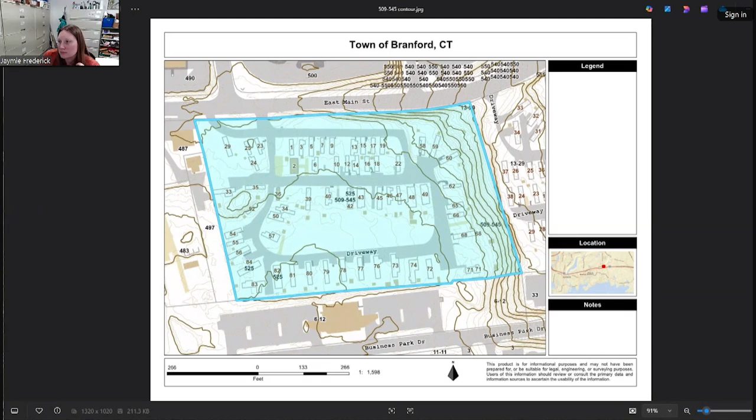But from my vantage point, it should be capturing any stormwater coming off of 612 Business Park and getting it into that feature, not allowing for it to pond and span over the property line. It shouldn't necessarily be capturing additional stormwater from 525 East Main Street that wasn't part of the original design. I don't think that's what they're trying to do with this plan, but I think the outstanding question the commission may have is whether or not that is a problem or not.

And I see again that you got a hand raised. Yes, if I may. Go ahead. Just a point of clarification.

The 2014 plan that Jaymie brought up, it's my understanding that plan was in connection to a proposed addition, either an addition and a parking area, or just an additional parking area, which was never built. So as I understand it, they got the permit, the Business Park Drive got the permit in 2014, but it was never built. There was a swale plan denoted on it, either 2003 or 2004, in connection to the construction of the medical building.

I actually was not able to obtain that from Town Hall. I don't know why it wasn't there, but it was on record and deed, and that exists. But based on my research, and I think Mr. Trinkus's research, I think he'll confirm as well, the purpose of the culvert and the swale actually originally was, in fact, at least in part, to accommodate the stormwater runoff from the mobile home park. It's just not functioning. So I just thought I'd clarify that.

Yeah, and the reason it doesn't function is from the western end of the mobile home park heading up to where the box culvert was installed, over the existing lawn, the stone bed that was proposed on the plan goes uphill. So the stone bed that was originally proposed as part of the medical building would never convey water because it's going uphill, and so therefore it just sat.

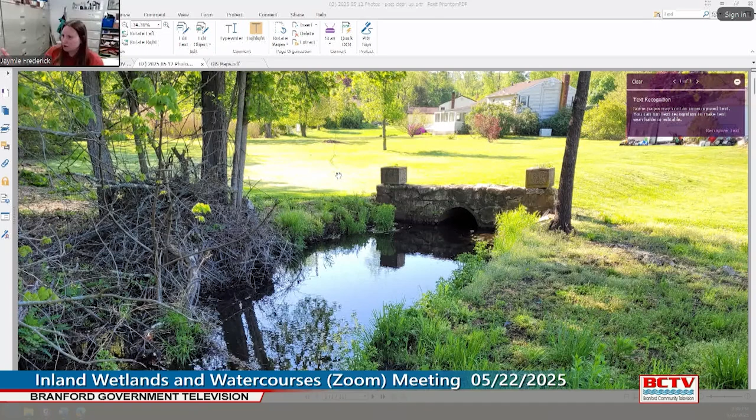So this is looking towards the residential properties. I'm not sure where the property line is, whether this is on open space. I think it's probably on open space property, but I don't know for sure.

Looking at the drainage culvert that outlets behind the property, the property owner indicated while we were on site that he was concerned with occasional blockage of flow due to debris in the watercourse. I told him that if there was debris blocking flow, he was allowed to remove that material, but I did suggest it should not be piled up, especially adjacent to the base of trees, because it could promote rot and deteriorate the condition of those trees.

This is a watercourse that outlets to a greater wetland complex area, and I don't think those pictures are terribly relevant. Here's where skunk cabbage is coming back. I don't know that there's anything that needs to be done, I think it will do its thing.

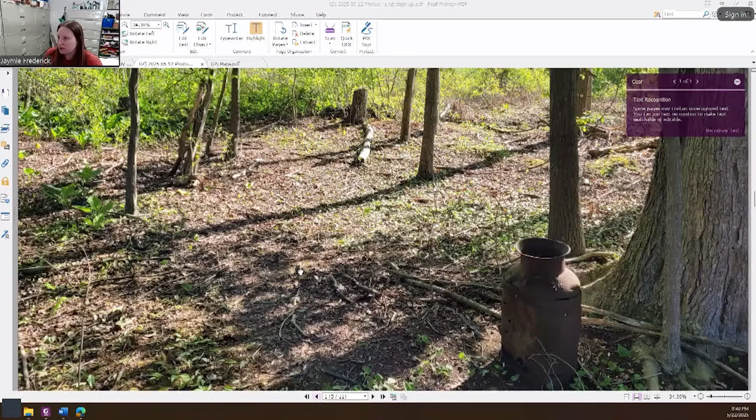And this is that upland area where I don't think any planting is required. Everything has been pulled out with the exception of this, which may or may not have been pulled out - I know the owner indicated he had some additional things he wanted to remove. I took this picture because the property owner mentioned there was some utility work last year, or possibly earlier this year, and that the utility crew was back there doing vegetation removal as well, which certainly seemed to be the case when I looked up and down the utility line.

This is Commissioner Bassermann. Jaymie, was the removal of the vegetation mostly invasives, or you don't know?

Honestly, I'm not entirely sure what the extent of removal of vegetation was, and I didn't really get into that too much with the property owner based on what I was seeing. I wasn't seeing any issues looking at this; the ground looks stable. There's still undergrowth or ground cover, and leaf litter hasn't been disturbed. To me, I don't think it's in an unacceptable condition, especially if it's left alone to do what it's going to do.

And for the most part, I mean, there were some invasives out there, but in the immediate area that was impacted, I wasn't seeing them. So I'm mildly optimistic that it won't infill with invasives. Knock on wood for me.

But yeah, it doesn't look to me like there's further activity that needs to occur. The property owners are now more aware of that open space, and I believe the property owner indicated he's interested in getting a survey done so he has a better understanding of where that property line is. We had talked about some future projects, which I think we'll keep in the 'he knows he needs to talk with me' category rather than dragging it out for everyone this evening. But that's kind of the long and short of what I have.

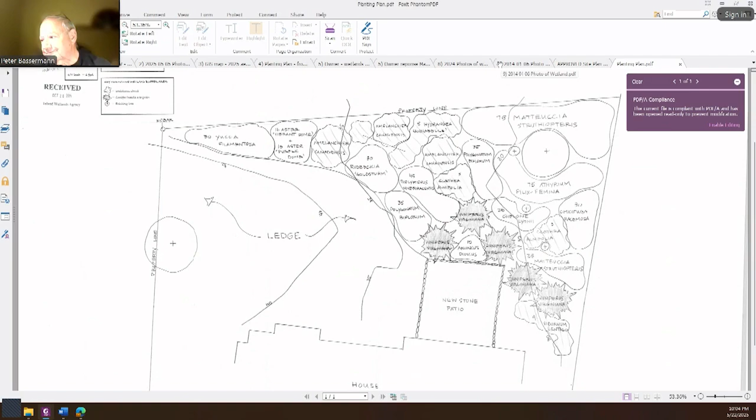Okay, and then the other question is whether or not a survey is required. In regards to the activity relative to the wetland, like I said, I think the wall is approximately in line with the garage side of the garage. You can kind of see that here. So it looks like distance wise relative to the wetland, that along with...

I saw a stake right behind this tree. I can't, unfortunately, see it in this picture. When I have a new neighbor there where the wetlands is, and the previous owner had his land surveyed, and when I built my house, I had my land surveyed, so all the pins are there in regards to the property lines, if that's what you're talking about.

Yeah, so I guess the question for the commission is, do you want an updated survey showing the location of everything? Is a less formal plan perhaps okay?

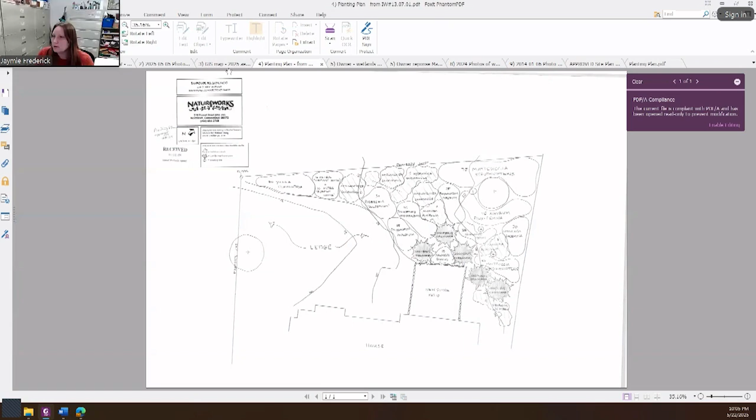I'm gonna jump to the NOV real quick. This is that tree that I thought you were referring to, it's still there. I'm sorry. That's okay. This one right there. Yeah, so this, I think that's the tree you're referring to. Yeah, I'm not sure.

It looks like I'm not sure, because there's that pin, but I don't know where that pin is relative to the property lines.

Commissioner Bassermann, Jaymie, you know where the wetland is, right? Approximately, yeah. And like I said, here's the pin, you can see it in this picture here.

I think if we can use... when were those pins put in? Just about, oh gosh, when did he sell? Maybe two years ago?

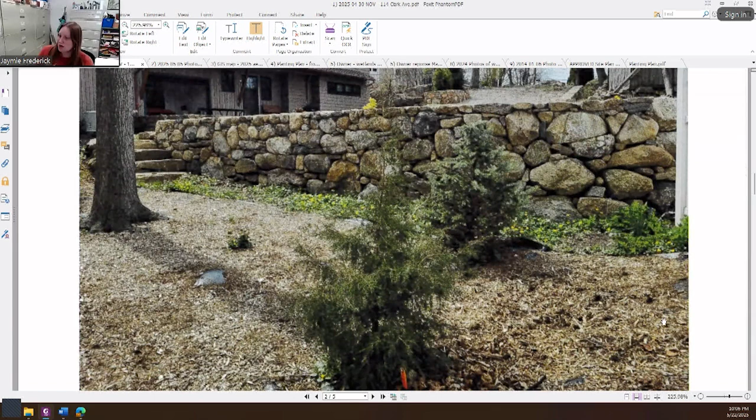I think that addresses it for this property line, but I have to admit, things are kind of tight on this side when I was looking at things again right before the meeting, in regards to this fence post here. Fences sometimes move, I don't know if that one has. But when you look at the approved site plan...

Well, I do have a pin to the very left, where Piscatelli's property comes and meets mine, and then to the right, but the fence post is just part of that, and it's a straight line. I don't know if that's acceptable.

So the pin that would be by that pine tree, and then there's one over here up by where the runoff is. Those are, you're saying, painted, there's a yellow pin over on this shared property line. Yes, where it says rebar found. Yes, and then that's the one that I believe is under that pine tree.

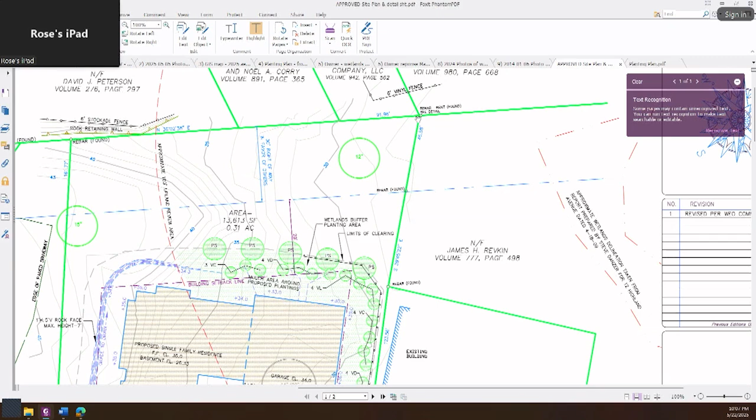If that's the case, my concern is that it kind of looks like — I don't know which direction it goes from here — but it kind of looks like it might be over the property.

Commissioner Bassermann, Jaymie, what do you need to feel comfortable enough to make the assessment when we get the application? Do you need a full survey? I don't know, I was leaning towards it wasn't necessary, but then when I was looking at this picture again, I kind of started to question it.

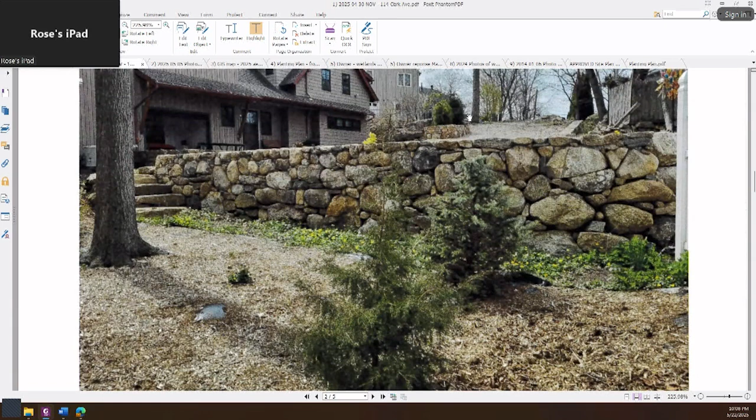Well, when I think about it, this is not my back corner. This is the property coming from what used to be Jim's property over to mine, to make the line from here all the way down the side of my house. The property line is further back beyond this.

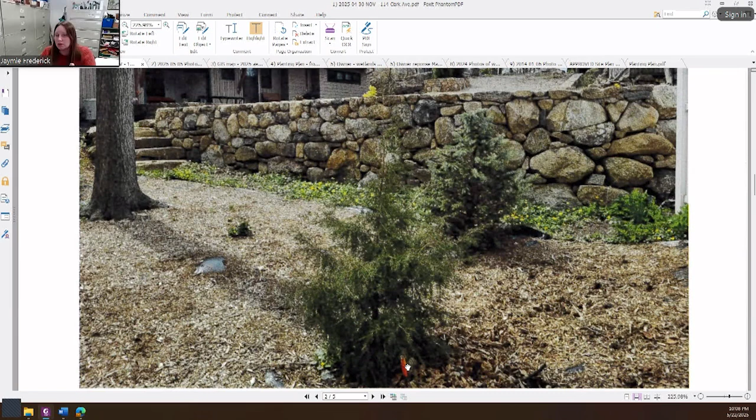I don't know if this is a property corner or if this is like a midline stake. It's not a corner. That's definitely not a corner. But again, looking at where this fence post is relative to the wall kind of gives me concern too. It might be that it's all fine.

A survey would certainly answer that question. A survey also takes time.

Is the A2 the only one, or is there a different survey that could be done maybe more quickly?

There are surveys that could be done more quickly. I don't know that they would necessarily — another alternative perhaps is a property markout, and if the property markout reflects that everything's on the property, that might be a way to move forward. And if it doesn't, then move forward with the full A2 survey.

Jaymie, this is Commissioner Bassermann, what's a property markout? I'm not sure who... Ryan, Commissioner Bassermann, can you hear me? I'm sorry, I'm reading the chat, so I could hear you, but I wasn't listening. Oh, I was — Commissioner Bassermann, what is a property markout?

It's basically where a survey crew goes out and marks the property line. It would be basically doing this, but it might not be so formal. Setting pins is a little bit more — you can usually pay more for that — whereas a property markout would probably just be wooden stakes, kind of like what you see when we ask for things to be marked out on site for sidewalks, rather than it being proposed buildings, it would be the property line.

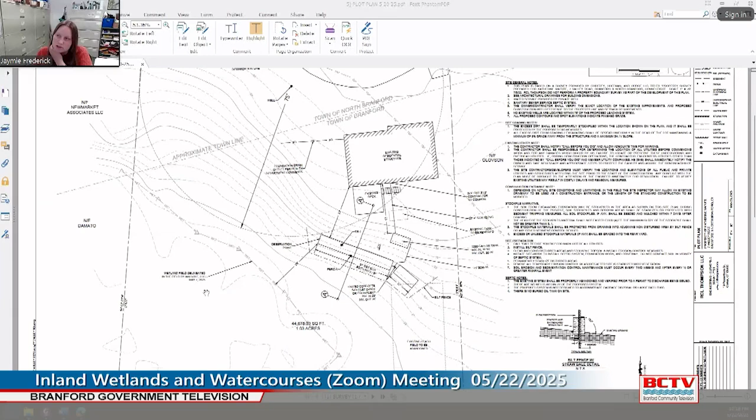The septic repair is being driven by some interior renovations they're doing. I don't know the exact circumstances of why East Shore is requiring the repair or replacement, but the existing leaching fields to be abandoned are located to the rear of the site. The wetland line is in the southwest corner. The replacement system is a little closer to the house, but further from the wetlands. The corner of the system is 29 feet from the wetland edge. The erosion controls during construction are a little closer.

The system itself is being reviewed by East Shore District Health. As far as removal of the old system, the existing tank is to be properly removed, and it's my understanding the leaching fields will be abandoned. Access would be on the far side of the house from the wetland, and you're seeing the approximate town boundary because this is on Valley Road, which you have to go into North Branford to get back into Branford.

Where are the new leaching fields? The new leaching fields are kind of northwest to the existing ones, closer to the house. So both the septic and the fields are moving away from the wetland?

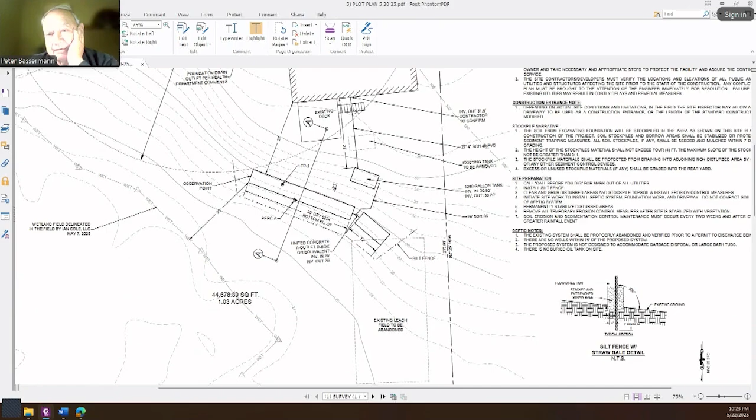Anyone feel differently? Anybody want to see this again? Not I. Okay, Jaymie, it's all yours.

All right, thank you, everyone. Thank you for sticking around. Thank you, Ryan.